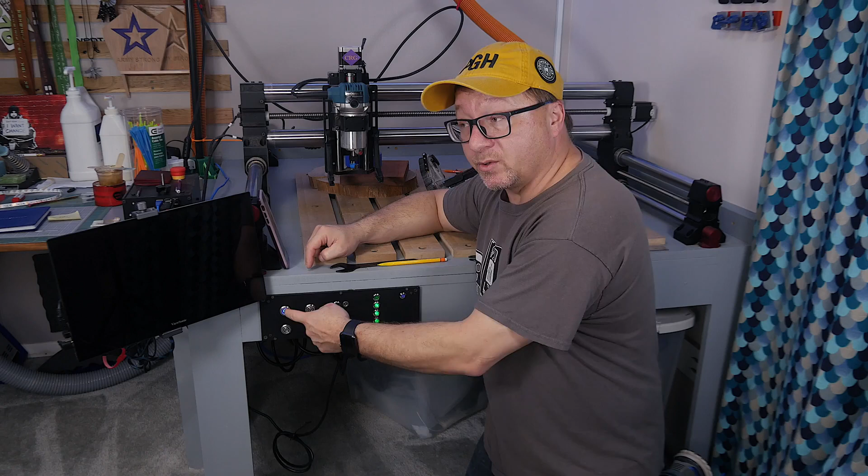So I'm going to go ahead and turn on my controller by pressing the switch, and you will hear the fans kick in and you will see the monitor light up. Please make sure you have your monitor turned on before you turn your controller on. This is something that happens frequently to new users where the Raspberry Pi will not recognize the monitor unless it is turned on before the controller is turned on. So it's important that you do that first. Once your machine fully boots up, you will see the screen here that's in front of you. It is asking you to home your machine.

Now, I will tell you that I do not immediately home my machine. Instead, I use my control pad here to actually move the machine closer to the homing location, which is the front left corner of the machine right here. And then that just speeds up the homing process. If the machine were all the way at the back or all the way to the right side, it would take a long time to reach that homing position. So this just helps me expedite my workflow a little bit. You don't have to do it, but I do intend to do it here.

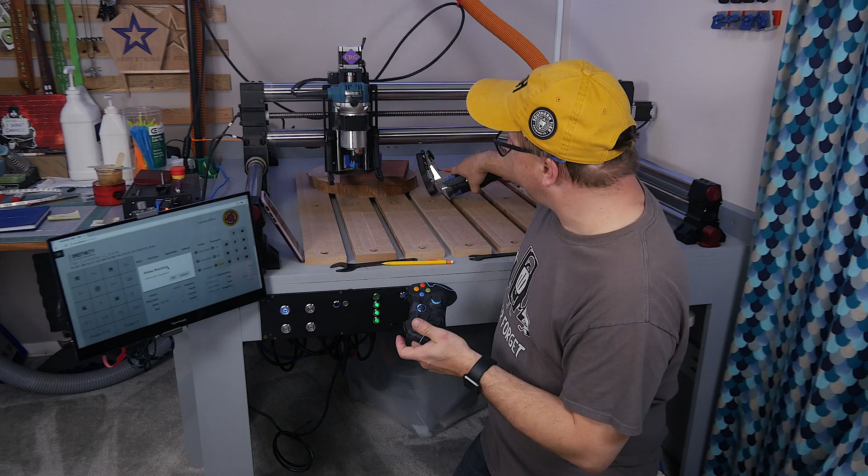So let's go ahead and engage our controller. Let's move things out of the way. And let's slide our machine up close to the homing position. Alright, now that we have our machine close to that front corner, I'm going to go ahead and click home. What that's going to do is cause the Z-axis to home, the X-axis to home, and then the Y-axis to home.

Now that your machine is homed and it is ready to go, this is the time where you want to actually put your stock where you want it for your milling operation and then zero your machine. So we home our machine once when we set it up and turn it on, and then we zero the machine at least once to set up for the initial tool path, and then we need to re-zero the Z-axis every time we switch a bit.

So the key thing here is that you home the very first time you turn the machine on, you zero X, Y, and Z at least once for each new stock, and then you re-zero Z for every new bit that you're using. This is something that can be a little bit confusing to new users, the difference between homing and zeroing, but after you do it a number of times, you will get used to it and it'll just become second nature.

There are at least two primary ways of doing the zero process for your material, and I will show you two of them. So let's go ahead and slide the machine back a little bit. I will bring a piece of wood forward to simulate the stock that we're going to cut, and then I will show you the two methods that I use most frequently to zero my machine.

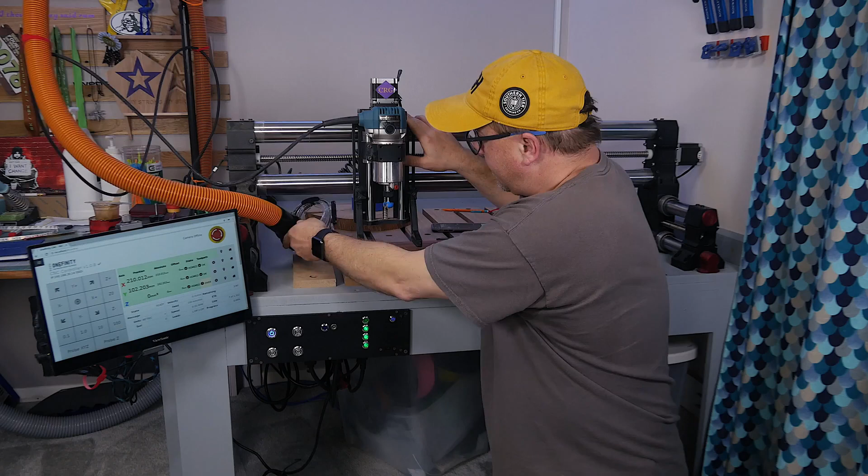So let's get started with the first technique of zeroing, and that is using a simple piece of paper with your bit to make sure that you have the proper distances set. Let's bring our machine forward a little bit and adjust our bit for the zeroing operation. You want to remove your dust boot and potentially even move your arms up a little bit if that's something that is in the way of the operation you're doing here. Now for X and Y zeroing, I generally try to use the bit that I am cutting with if it makes sense.

In this case, I happen to have a bowl cutting bit in. It would be really hard to zero properly with this bowl cutting bit. So what I will do is I will actually add a V cutter in to do the XY zeroing, then put the bowl cutting bit back in, and then show you how to do the Z zero with the paper mechanism. I just put this in just finger tight. It doesn't have to be super tight to do the zero operation.

So let's use our controller to slide our machine over a little bit and then jog it down to close to the top of the workpiece. Now what you want to do is you want to jog your machine to close to where your origin point is. So in this case, I'm going to assume the origin point is in the lower left-hand corner of the material. If you happen to have it centered, or if your origin is at your wasteboard, then you need to put your bit in that location.

Once I get the bit pretty close, then I slow the machine down and I narrow in right on where I believe the X and Y position needs to be. Once I have it where I need it to be, then I use line of sight down the side and the other side of the board to make sure that it is as close as it can be to that edge. All right, so X looks pretty good there. Let's check Y. All right, so at this point, Y is a little bit too far this way.

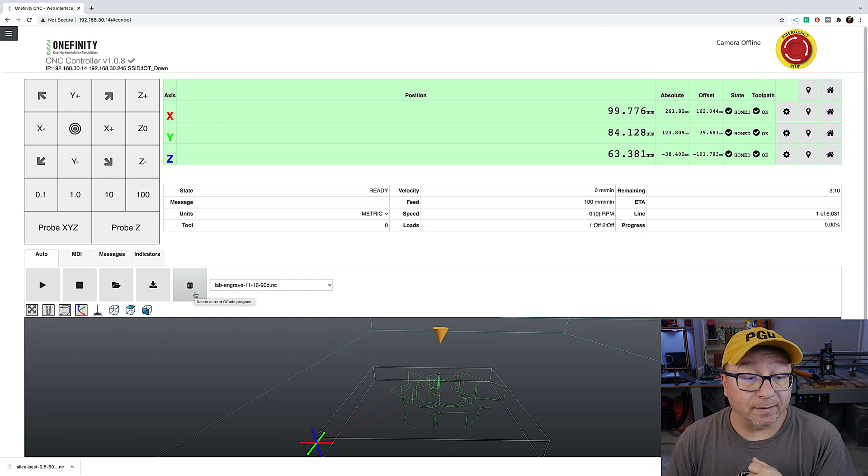You can upload new G-code, which we'll get to in just a minute, download the G-code that you have selected, and then delete the G-code that you have selected. In this kind of bottom section here is a rendering of your G-code.

This only works on a computer. It does not work on the Raspberry Pi screen because it does not have enough compute capacity to actually render this. So you can actually minimize this by clicking this little arrow button here, and it'll decrease the size of this and increase the real estate on the screen.

At the very bottom of the screen, what you see here is the actual G-code. This is the execution file. It's informative. It's not very useful for human beings, but it does run through this file as you're executing, and it does show you that the machine is operating, although I do have a tendency to watch my machine while it's actually doing its operation, so I can pretty much use my eyes to make sure it's doing something. So again, like I said, it is informative, but not terribly useful, at least not for me.

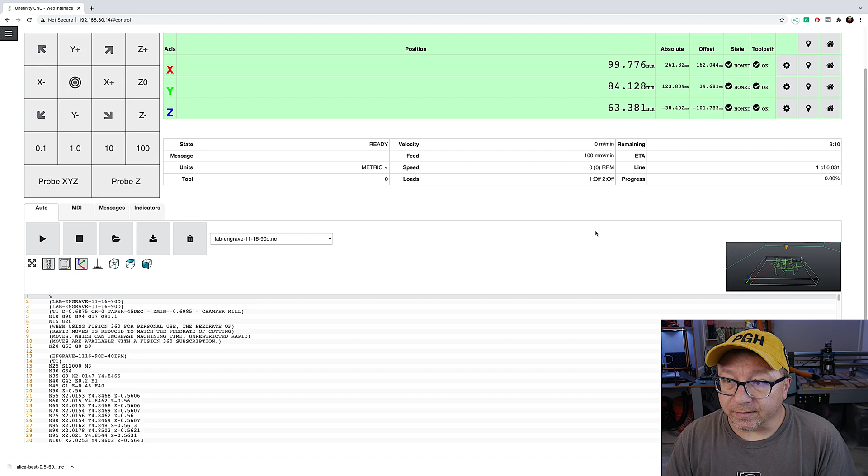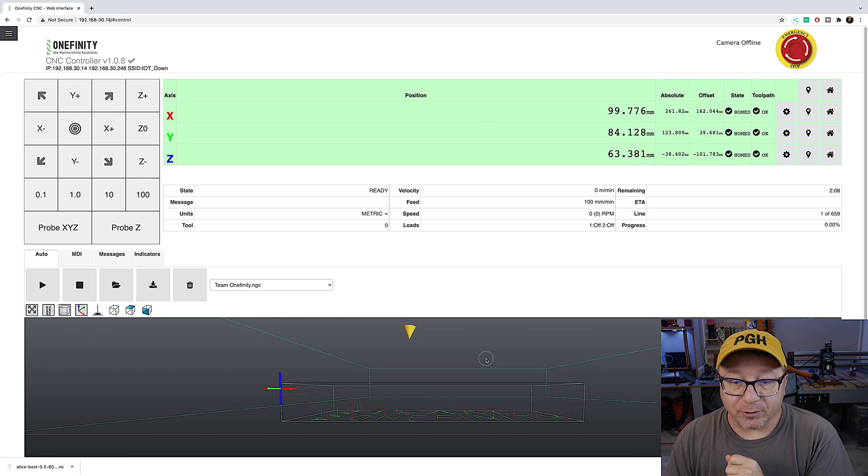All right, so now that's the basics of the user interface. I want to just go ahead and focus in on a couple things that are kind of unique to the Onefinity that you probably might not run into with other machines. So right off the bat, you do have a list of G-code files that have previously been uploaded. So if you're a new machine, you probably likely only have one, and that is this Team Onefinity G-code. That is the actual sign that you got with your machine, which is pretty cool. They give that to you as a default.

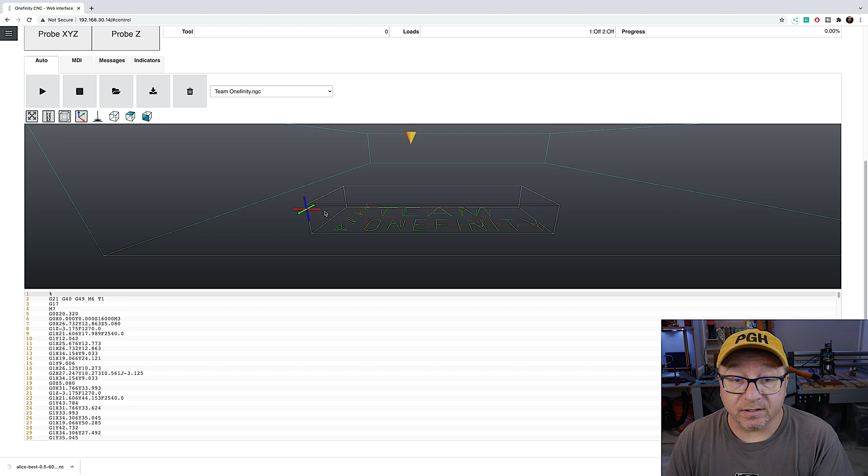They do not, however, necessarily tell you the bit size and the feeds and the speeds, so I've never actually tried to execute it. But what is interesting about this rendering is it does allow you to validate the origin of your G-code file that you set in your CAM operations. So for example, in this specific case, the origin is that lower left-hand corner of the stock, and the current position of the machine here is this little diamond, I guess it is, or I guess triangle. So the machine is essentially just above the stock, just above where the stock needs to be.

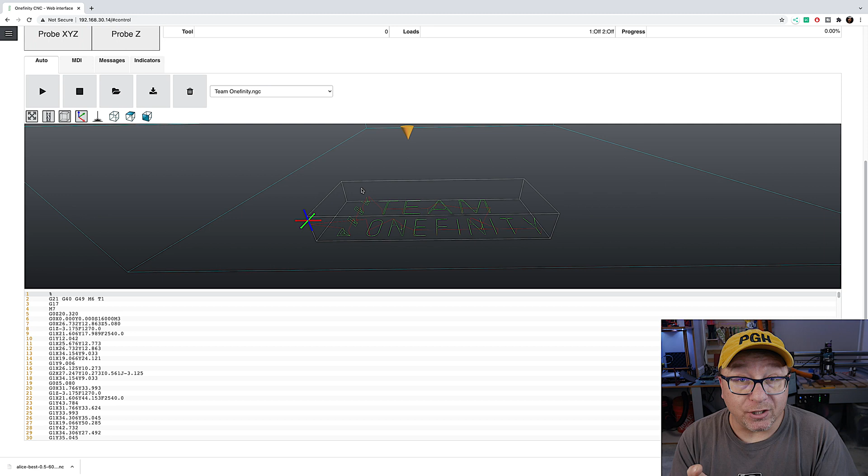Now, one thing that is interesting about the Onefinity, what you see is this outlined white box here is not the size of the stock. Those are the boundary of the machine as it is moving. So I'll give you another example here. Let's go back to the engraving I did for my Labrador Retriever here. We'll just pull this up real quick. All right, so what you can see here is the origin is down here in this corner, but the machine only moves all the way up to this side. So the size of the stock was actually completely square, but you can see the machine is only moving a partial size of the stock.

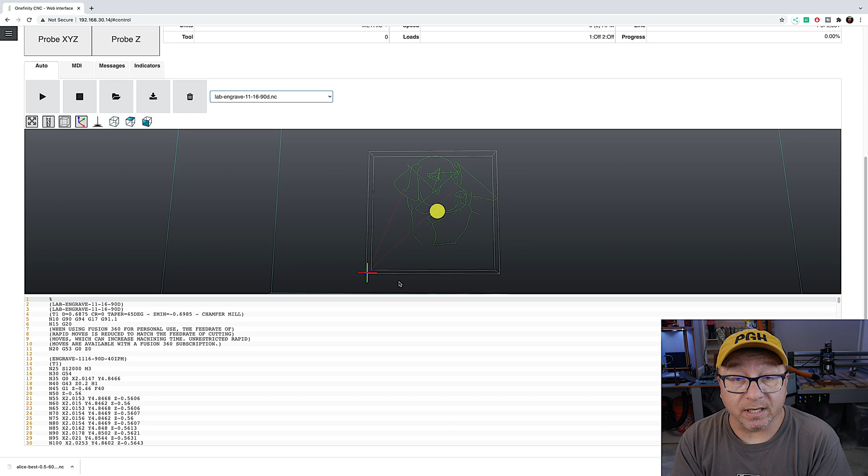So how do we upload G-code to the Onefinity controller? Well, that's very easy. You just simply select this folder icon and it is going to launch this file browser for you. If you're on Windows, it'll look a little bit different. I am on a Mac. And then you go to your project files and then you just select your G-code. For example, I'll go here. I will select the, let's go with the pocket outline here, and we will upload that. And so it will upload, it'll render very quickly, and then it'll show you what the actual file looks like.

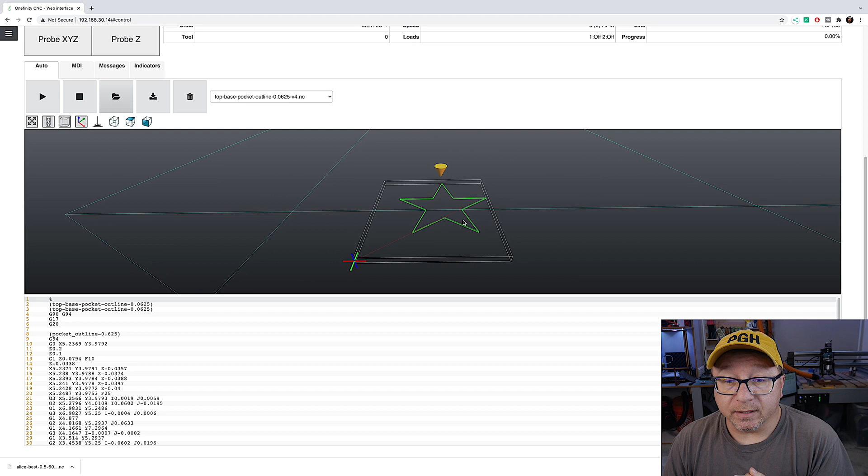And so this is a good visual indication that you have loaded the correct file and that your origin is set properly. If for some reason your origin is in a different location than you think, or if you have zeroed to a different location, you might get some warnings over here under this toolpath area that indicate that your machine is either under or over. And so what that means is that the G-code is telling the machine to move to a location that it can't access. So once you zero your machine, if you want to maybe go left, and if it goes left too far, it's not going to be able to go that far. It's going to say that it is under. If it is going too far outside the boundary, then it's going to say that it is over.

So this is one area that does trip up new users with the Onefinity. It is relatively unique to the Onefinity. Some of the other machines don't do this check. Now, they did update the software, so it does run this check as you're rendering it here before you click play. Before, it would only render the error once you clicked play, and sometimes even during a cut operation, which was really unfortunate because then you'd already be in the process of doing some work and then it would error out. So at least the error happens now before the actual operation starts, and you can try to decipher it and debug exactly what the issue is.

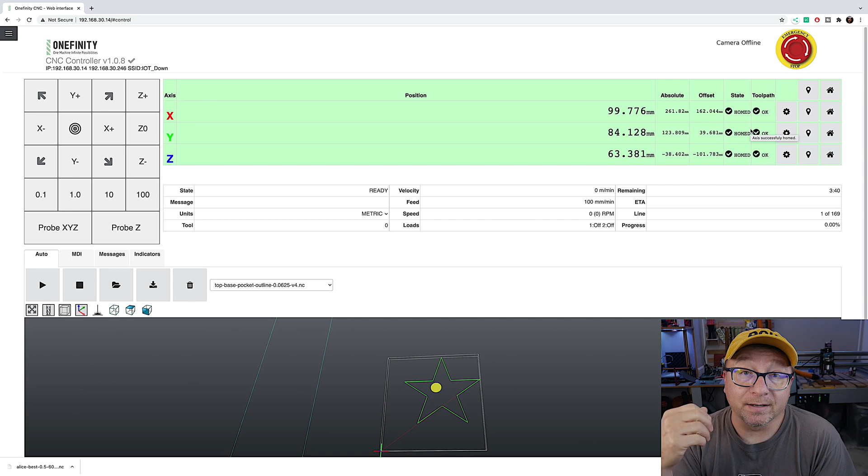Generally, what these errors mean is you have not zeroed properly or you have not zeroed at all, and so the G-code is telling the machine to move to a position that is outside the boundaries of the machine relative to the homing sequence. So that is why it is important that you home first, then zero, and then select your appropriate G-code file.

Now that we have the G-code loaded, to execute the G-code, it is very simple. What you need to do is go over to your machine. You need to turn on your router. You need to turn on your dust collection if you are using it. And then you simply click the play button and the machine will start to move.

If you need to pause your machine for some reason, you click the play button again. That'll pause the machine on the current G-code line. And then you can click that button again. It'll start right where it left off and continue with the G-code.

If you need to stop your machine for some reason in a non-emergency manner, you just select the stop button. Now, if you select the stop button, it will start the G-code over again from the beginning. So if you're just looking to pause, use that pause button. If you want to stop, then actually hit the stop button and it'll restart.

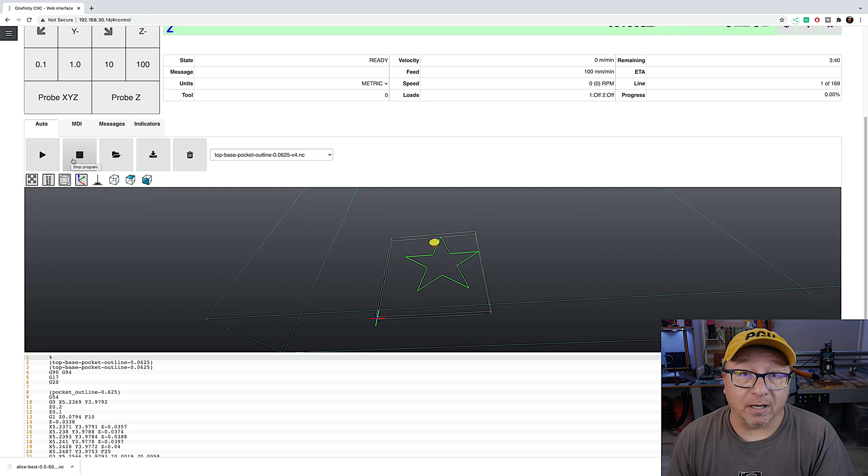If there is some sort of emergency or something goes completely awry while you're cutting, I do recommend either using the emergency stop button here on the screen or actually hitting it with the palm of your hand on the controller. I have done that in the past.

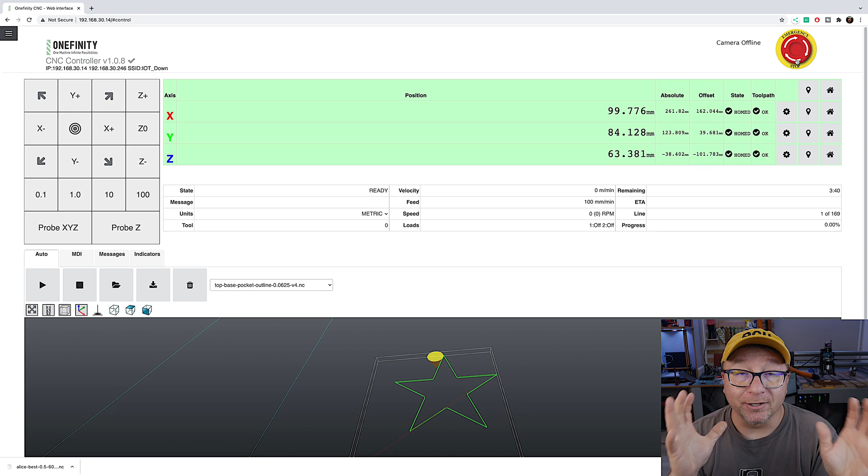Now, one warning on this: when you hit the emergency stop button, it kills the power to everything, so you have to start the entire process over in terms of homing and zeroing. So if it is truly an emergency, just know that you are going to start over, and generally speaking, if it is an emergency, that's probably okay.

Two things I would like to note for the user interface. First, when you upload a number of files, this drop-down can get very large and you can have a lot of files in it. So you do have the ability to select a file and click the delete button here.

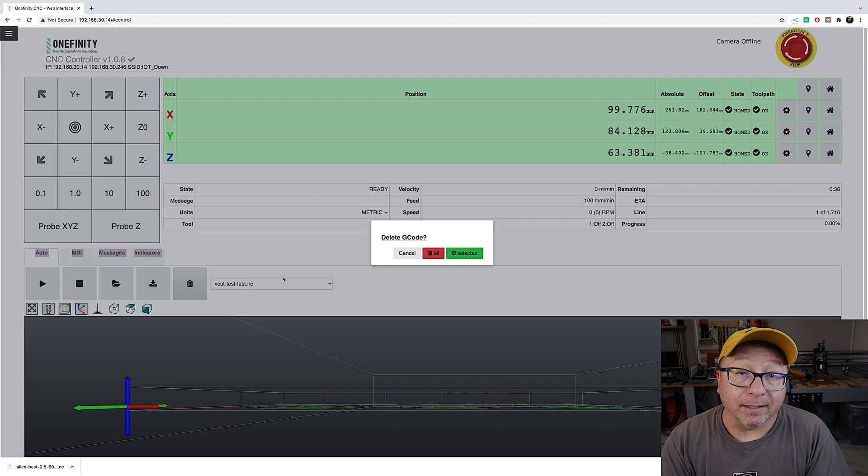Now, when this pop-up comes up, you have the option to delete the individual file that you have selected or delete all the G-code on your machine. You cannot currently select multiple individual files short of all of them. So that's a little bit of a bummer, but it is a feature that they are working on.

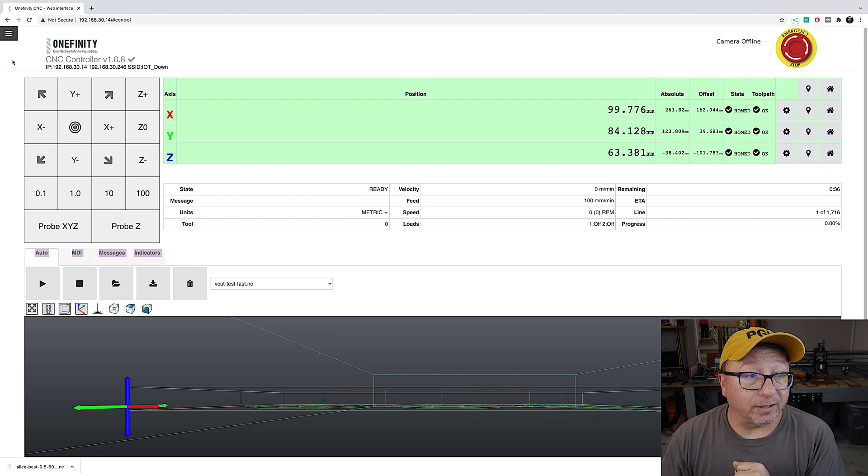The next thing I would like to cover is when you are done cutting, it is highly advisable that you shut the machine down in an orderly manner, and not just kill the power with the power switch. The way you shut the machine down is you click the fly-out menu here, hit the little power button, and it'll ask whether you want to shut down or restart. In this case, I'm going to shut down my machine.

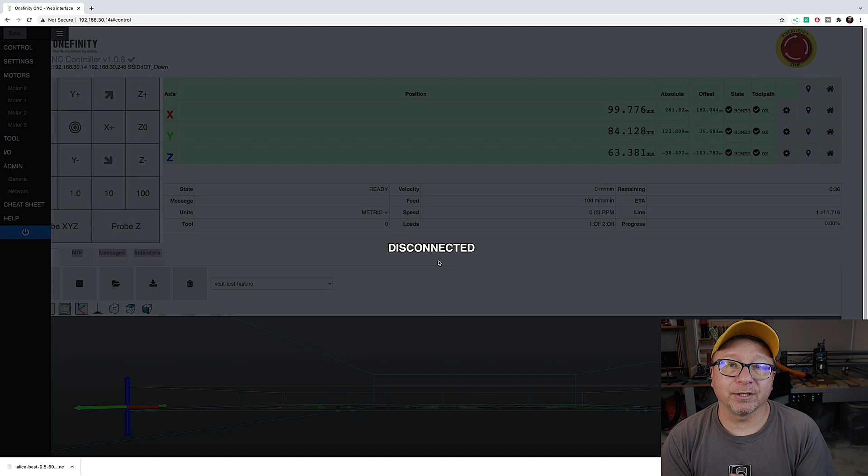The monitor in the back will go to the soon-to-be-disconnected screen that you see here, and then the machine will shut itself down and it is safe to remove power. So those are two important little notes about the user interface in Onefinity that might be a little bit different than other machines you have used. All right, let's go ahead and wrap this video up.